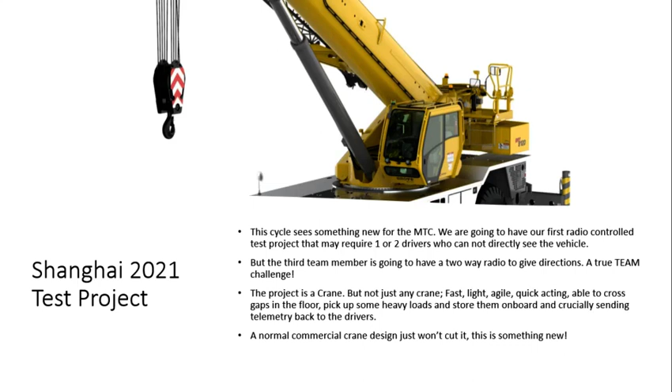So the project's a crane, as I said, but not just any crane. This crane's going to have to be fast, light, agile, quick acting in all of its maneuvers, able to cross gaps in the floor and pick up some heavy loads for its scale, and store them on board, and crucially send telemetry back to the drivers as well, so that they know what it's doing. A normal commercial crane design just won't do it for this - this has to be something new, something different, and breaking the mold a little.

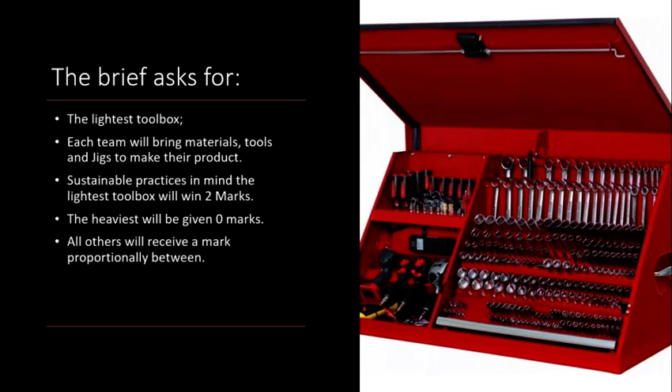So the first element of the test is to do with the toolbox. We like to be environmentally friendly, so what we're asking each team to do is bring the minimum amount of tools and jigs they can to make their product, and we do this by actually marking that. We weigh all of the products when you arrive - the jigs, the tools, and all of the materials - and the lightest toolbox will win 2 marks. The heaviest on that score will get 0. Everybody else will receive a proportional grade in between those 2 boundaries.

And then we have a judgment of work quality and visual appearance of the test project.

Now, this is based on the finished product, and we're looking for things to be made well and accurately. We're looking to see that there's no sharp edges, burrs, and all those kinds of things that come into separate criteria as well. But this one is based on the main appearance of the product and how well it is made.

So 3 judges will inspect it and give it a grade of 0 to 3. A 3 is above standards, well above the market standard. A 2 is a market standard product, something you could actually sell. A 1 is an industrial standard product, something you might sell to a company rather than to people in the world. A 0 is below that—in other words, not finished, or really poor quality and unlikely to last.

Now the brief also asks for the product to be finished, and all surfaces should be painted or covered by other means unless self-coloured. So we want something that looks nice, not just looks like a bunch of metalwork stuck together.

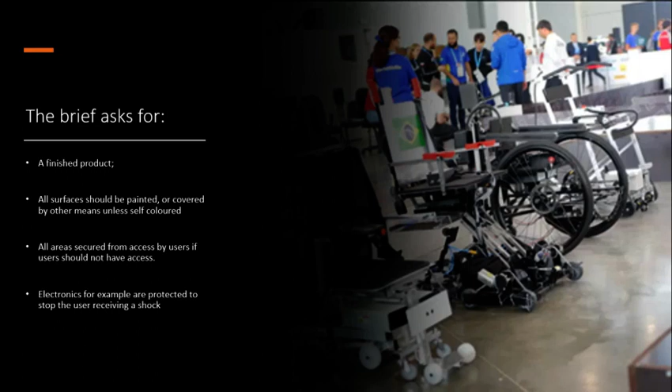All the areas within it, especially if they've got electrical access or cogs moving and that kind of thing, should be secured from access for the user for safety, just like any real world product would have. And we don't want electric shocks if we can help it either, so the electrical system should be covered as well.

Now, one of the reasons we've not actually used radio control before is that one radio control system might interfere with another. So in this brief, we've stated that you must use a system that will not interfere with another. That might be a paired Bluetooth system, for example, and you can buy the control handset and the receiver—you don't need to make them during the competition, which is again a departure, because normally you have to make everything.

A 2.4 gigahertz radio control system is another example. They're paired, they will not interfere with each other, and we need to make sure of that. So long as you have a good paired system, it should be easy marks on this particular criteria.

So, part of the physical attributes of the crane: we're looking for the whole crane to fit in a 500mm square cube. We're not only asking it to fit in that, but it has to do it under its own power. So if you have a crane that's a metre long during normal use, it needs to be able to pack under the controls into that 500mm cube.

It's not only required to fit, but we're going to race to see who can do it the fastest. So teams will have to pack down the boom, maybe retract the boom as well, turn the crane into the correct position, drive into the box, and make sure it doesn't protrude out of that box. Time will stop. The fastest team to do that will gain a mark, the slowest team will gain 0 marks.

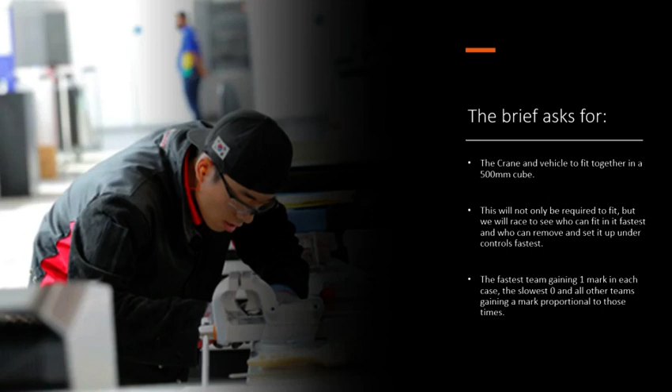We're then going to do that in reverse—how fast can you get it out and set it up? So it'll be drive it out, drive it across the 2 meter line, set the system up again under its own power. The fastest team will get 1 mark, the slowest team will get 0, and everybody else will be proportionally marked in between.

We're also looking for a lightweight product, so there's a bit of a trade-off here. If we make it too light, picking up some of the objects when the boom is at full extension means it's probably just going to lift off the floor and fall over. That won't stop your competition, but it will hinder it and receive a penalty. So you have to find the fine balance—how light can I make my design while still retaining the low centre of gravity for lifting?

Part of the challenge, not impossible. Some quite hefty, complicated calculations in there to work it out perhaps, but hey, maybe you're just going to go for it and see what happens. So the lightest product, when we put the whole thing on the scales, will gain 2 marks, and the heaviest will receive 0, with everybody else proportionally marked in between again.

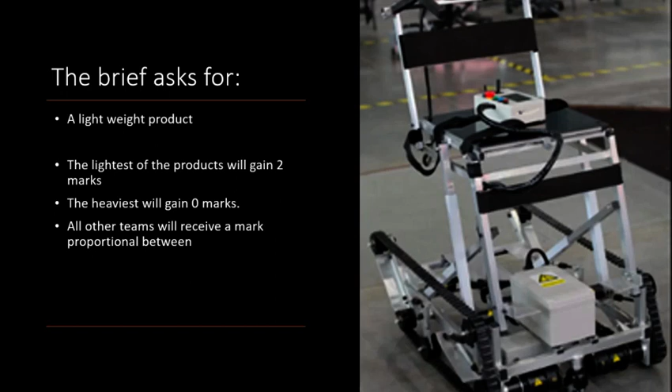Now the brief also asks for the crane to have stabilizers, so you have to fit them if you want those marks.

If you don't want the marks and you don't use them, that's fine. You might say putting the stabilizers in costs so much money, I'm going to forgo the marks on the costings. Well, that's great, that's fine, your choice entirely.

But we're asking for stabilizers for lifting projects and procedures that will touch the floor within 50mm of the front and rear of the crane. Now, that doesn't mean they can't stick out another 500mm, and it doesn't mean they can't stick out sideways 500mm. They've just got to be within 50mm of the front and rear of the crane.

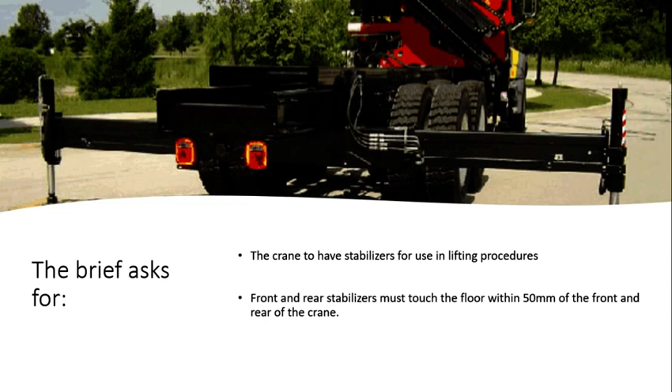Now, you could have two stabilizers that are long and come down to cover the front and back on either side. You might have a square ring of stabilizer that comes down and touches all the way around the vehicle. You might have one at the front, one at the back, whatever it is you want to do. The choices are totally yours, so long as it stabilizes the vehicle and so long as it touches the ground within 50mm of the front and rear of the crane.

Okay, some of the electronics details now, perhaps. The crane has to be able to rotate 720 degrees in both directions on the vehicle. In the brief, we've distinguished between the crane vehicle, that's the vehicle driving the crane around, and the crane itself being the part that moves on top and does all the lifting.

So we're asking that the crane can rotate 720 degrees in both directions. You might have to come up with some clever electronics to do that, and that might impact on your costs. You might find a very simple, very cheap method. If you do, can you send me an email and let me know what it is.

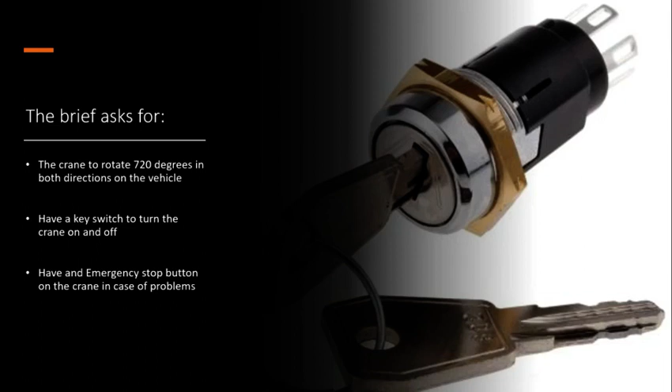We're also asking for a key switch, much like the one pictured, that allows you to turn the power on and off for the entire crane. Obviously, power isolation is a good idea, and on that point we also ask for an emergency stop button that, when hit, will knock power to the entire crane and stop everything from working. That's kind of crucial, essential stuff that you'd have on any product of this nature.

So some details for the electronic side of it now. This is a little bit of programming with a little bit of building and maybe some mechanical workings to actually house it as well. But we're asking for an LCD panel that is not attached to the crane. It's actually going to sit in the driving booth with the drivers, and it should receive telemetry and display forward when the crane's moving forward, reverse, left, right, stabilizers active and inactive.

Stabilizers active being when they're down and touching the floor, inactive when they're lifted up and not touching the floor. And then for the crane itself, we want to know: is it rotating clockwise or counterclockwise? We want the boom angle in XX degrees, and if you look in the brief, there is actually a variance, a tolerance for it.

Battery level in XX%, so we want to know when the battery's full - 99% with the XX is as high as you're going to go - and we want to know when the battery becomes unusable. And then we want a system active and ready message to say, yep, we're ready to go, everything's being received, the telemetry's working, and we can actually drive the crane.

And then finally, when we turn it on, just a little bit of jazziness, why not say WorldSkills Shanghai 2021, and we want that for 3 to 5 seconds when it's first turned on. If it's 4.5 seconds, you get the marks. If it's 5.5 seconds, you don't. It's as simple as that, really.

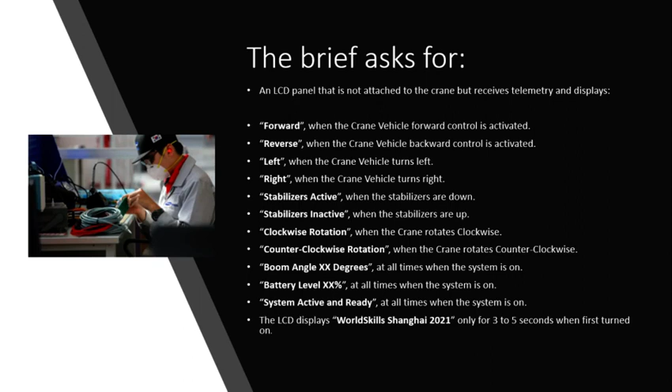Okay, so then you're going to have to demonstrate some of the mechanical items as well. We're looking for the boom angle to go horizontal at 0 degrees, parallel to the floor. We want the boom angle to go vertical, so 90 degrees or greater. If you can get it to 120 degrees, fine, you've got more than 90. If it only goes to 88 degrees, sorry, you won't get the marks.

The crane lifting cable needs to be a minimum of 1.5 meters long. You're probably going to need that anyway for some of the lifting operations based on the heights we're actually going over the top of the wall, so that's not an issue. And we need to show that it can be fully withdrawn - I think within 20 millimeters of the end of the boom should be your lifting device.

The lifting device itself will be able to grip and hold a 1 kilo item, which is specified in the brief, and go through a clockwise rotation without tipping over, and do the same in the anti-clockwise rotation. Obviously centripetal force is going to kick in if you go too fast, so how fast you want to go, what's your danger level, that all comes into practice and controls.

The crane vehicle will also need to be able to demonstrate that it can move in a straight line forward and move in a straight line back, without any steering inputs. That kind of shows us your fitting abilities - is everything made correctly, or are your tolerances out, and does it crab and go around a corner?

It'll need to be able to deploy and retract its stabilizers as well, so that we can actually see that all the controls actually match all the actions and everything actually works.

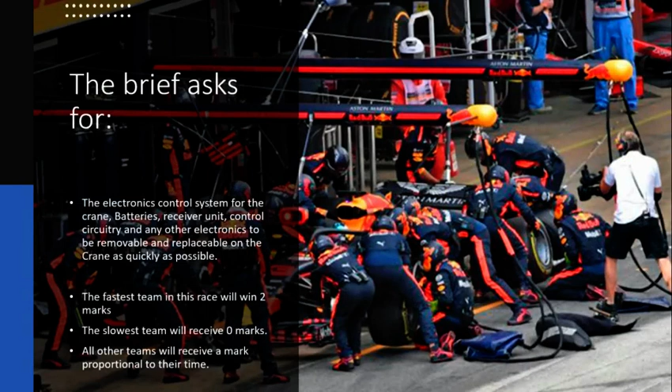On the case of time trials, we've seen a couple before, but this time this is a maintenance one. In the past we've done wheels and we've done batteries as maintenance, but this time we're going to go for something a little bit different. This time we're going to ask that all the electronics on the crane itself, or crane vehicle, wherever it's housed, can be removed. Now that might be 1 box, 2 boxes, 3 boxes, might be 4, 5 boxes, depends on your design. But they need to be removed as quickly as possible and replaced as quickly as possible.

So we're going to do a team race, and the team will run to their crane about 2 meters away. They'll remove whatever electronic control circuits and boxes. They'll come back over the 2 meter line. A judge will say go, and they'll go back, refit them, and then drive the vehicle over the line to prove that it works after the replacement of all the electronics.

Again, this is one of those marking graded categories, so we don't know how all the other teams are going to do - this is where the excitement builds. 2 marks will be given to the team who are fastest, 0 marks for the team who are slowest, everybody else proportional in between. This is the one that starts to get the giggles really going.

We also have a target area as another criteria, and again it's going to be fastest team to do this is 1 mark, slowest team is 0, everybody proportional in between. What we're going to do is start the crane off in a certain position in the center of a straight course. Behind the crane there will be an item to pick up, and in front of the crane there will be a small target area. The idea is to race backwards or turn the vehicle round, whichever you find fastest, go and pick up your object, go back to the other end and deposit it, and return the vehicle to the start line. So a nice, simple, easy race.

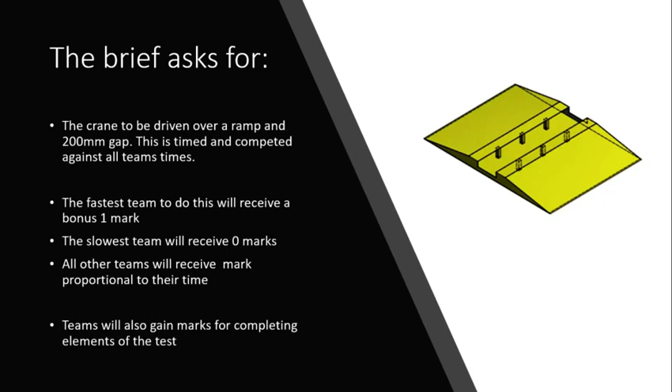The brief also asks for the vehicle to be able to negotiate a 75mm square speed bump. There are a couple of ways you can do that. One is to have nice big wheels or tracks. Another way is to have some kind of mechanism to lift you up over it. Well, the choice is yours.

The choices are infinite. So the crane needs to be able to be driven over the set of 3 speed bumps in a forward direction, set 600mm apart, and then the same in a reverse direction. You need to be able to score for both, so you'll get marks for successfully completing in the forward direction and marks for successfully completing in the reverse direction. If you get 2/3 of the way in the forward direction and for some reason stop, you'll be given the opportunity to still pick up the marks in reverse, and vice versa.

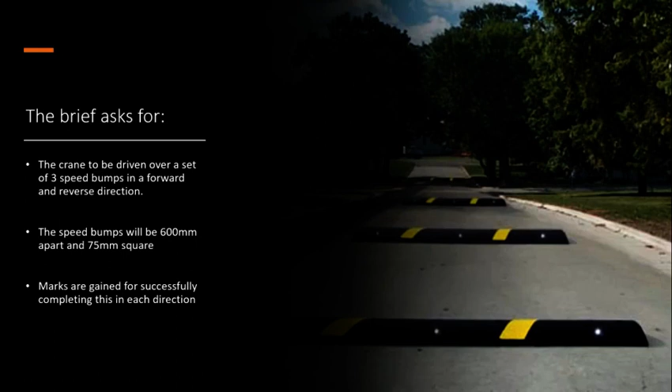What you're going to be asked to do, on remote camera, is have 2 drivers sat in a booth where they can't see the course other than on an LCD screen that they've made, or the one we've supplied if theirs doesn't work, and a spotter with a 2-way radio to give them directions. The team are going to be asked to drive around this course in any way they like. There are 2 options really.

Once you've picked up the objects, you can pick up as many or as few as you like. So let's say we pick up 2 objects, we have to be able to go over speed bumps during those 2 object pickups, and then you can drive back to the depositing area. Now, number 1 doesn't necessarily go in deposit area A, it probably goes in C or D. So you'll need to know which place to actually deposit them, and that'll probably be the spotter's job, saying left, right, number 3 goes in E, whichever it is.

Now, if you wish to access the area for unloading, there are 2 ways of getting there. One is over that ramp we talked about earlier with the 200mm gap in the middle, or secondly, there's a bit of a course you can negotiate around, so if you can't make the ramp, you still can compete in the time trial.

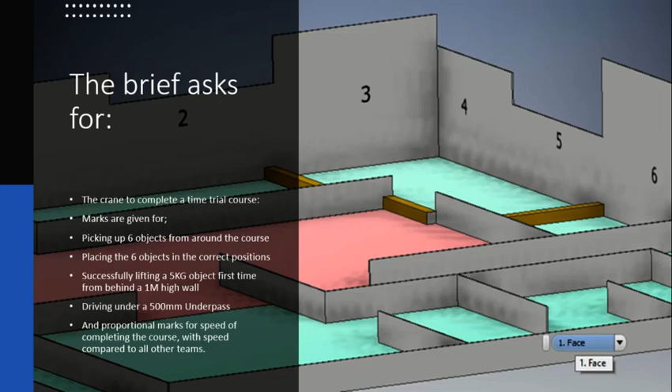Okay, then the final time trial that we're going to be doing is the movement of M6 by 35mm bolts. So we've got a course that's a couple of meters long, and there's two containers. One will be empty at the top of the course, one will be full of 5 kilograms worth of M6 35mm bolts. The team will be required to then drive for up to 30 minutes.

If they break down in between, that's fine. There's still marks available because somebody else may break down before you. And also marks available because you may have still managed to move an awful lot of bolts before you broke down. So there's two actual marking categories: one is that you continuously move for the full 30 minutes, and the other is based on the weight of bolts you managed to move.

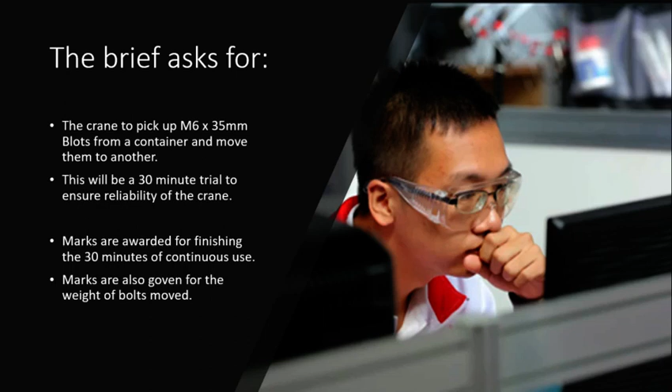So what will happen, you pick up to 5 kilos of bolts. You might only pick up a kilo at a time. You might be able to pick up all 5 kilos using the crane itself, load it on board, drive it up to the other end and unload it. When the first container becomes empty and the second container is full, the spotter is allowed to swap them over while the drivers continue to drive, and a judge will note that that's one 5 kilo load taken. And we keep going for as long as you can and move as much as you possibly can.

Okay, so a couple of things you need to be aware of. We normally have a 3-day build time, and on C4 we call that test day. Some of the tests are conducted throughout the competition itself, C1 to C3. There are a couple of tests we even do on familiarization day, which is normally C-2. But on C4 we do the bulk of our testing, so all the time trials, all the weight categories for a finished product, all that kind of stuff - C4 is dedicated to that. So it's a real day of fun and a real day of sweating for some people, but it's brilliant - one of the most enjoyable experiences of my life.

So on C4, we'll do all the tests in the order, and the order is specified in the brief. Now, bear in mind, in the brief itself, not only do we have the criteria, but below the criteria, the brief spells out exactly how the test will be conducted. So when you're doing your own trials, when you're developing your product, you have to take all of that into account, but you can also test it in the same way that it will be tested to make sure. So it also gives you an order of the tests, and I would say if you're conducting any tests, do them in that order, because if it breaks down on one test every time, then you know you've got a severe problem.

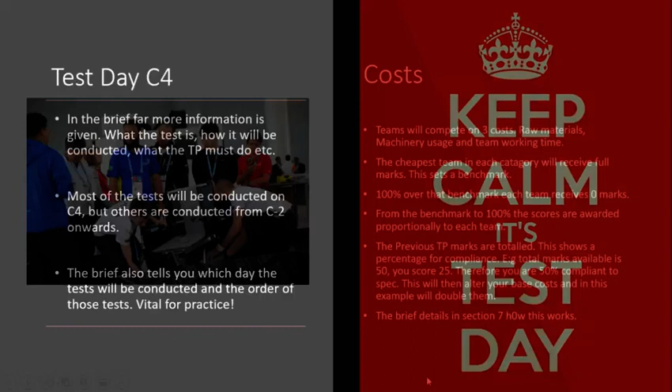Okay, so we also have a little section of costings, and again, we don't know what any other team's done. One team might be able to make it for €10, another team might cost €50,000, we just don't know. So we will compete on 3 actual costs. One is the raw materials, so how much did all of the components to make your product cost? Now, some of those are done on weight to make it even around the world, so things like raw materials, metals, plastics, batteries - they're all done by either watt hour in the case of batteries or weight in the case of plastics and metals, and different types of metals and different types of plastics have a slightly differing cost. There is a spreadsheet available that we'll quite happily send out to anybody that actually is to be used to put all this together.

So we also ask for evidence of the raw materials. If they're done by weight or watt hours, then we don't need the evidence. But for everything else you buy, so it might be a resistor, it might be a cog, whatever it is, we require a link putting into that spreadsheet that shows us where and what that particular item is. So where did you buy it? How much did it cost? Obviously that link then with exchange rates, especially if you buy it outside of the country you're in, might change a little, and we do allow for a little variance on that, because everybody is required to use an exchange rate which is on the 1st of April of the year of competition.

The second area we use is how much machine usage you do. There are timesheets for booking on and off machines, and we will actually calculate the time that you've used on a lathe or on a milling machine, maybe in the welding bay, etc., and they attract a cost, and the cheapest team will win that category.

Alright, well, Portfolio B - that's a little bit different. Portfolio B, I often say to my national teams, and the same to my international teams, you probably hand this in 3 times, or you need at least 3 copies.

So you come on familiarization day and you hand in a full set of 2D and 3D and schematic drawings to the experts. They'll use this for a toolbox check to make sure you've got nothing that's contraband, to make sure that your raw materials are at least 50mm longer if they are lengths, or 50mm in 2 directions if they are sheet materials, and to make sure that they are a raw material and not a pre-cut, ready-to-go material.

So one set goes to the judges. A second set you will need, which has to be on coloured paper and has to have draft on it, so that we know that's not what you're going to hand in at the end of the competition. That might be your set of designs and plans that you're actually using to build the item. You might be very well drilled and not need them.

Then Portfolio B is part of the competition, so somebody has to do the 2D and 3D drawings and the schematic drawing. It can be one person or the whole team, that's your choice. But by 12 o'clock on C3 we expect that to be handed in, and that's what will actually be marked, against the ISO standards.

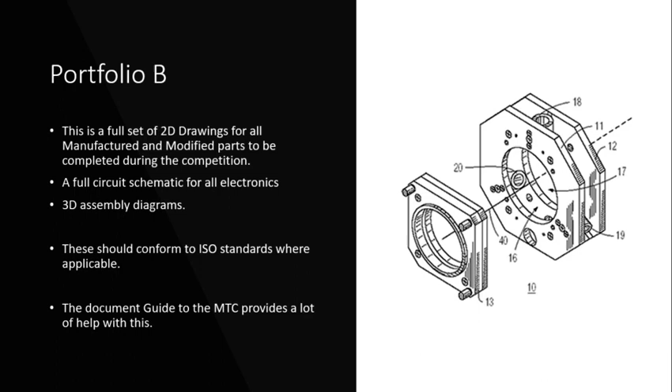And then that brings us on to the surprise projects. Each country is asked to bring surprise projects with them, one for each surprise area. Now we have CNC milling, manual milling, turning, electronics assembly, additive manufacturing, reverse engineering, MIG welding, TIG welding, and sheet metal fabrication. All of those could be selected. We normally select between 7 or 9 of those surprise projects and make up 30% of the marking scheme with that. That's our 30% variance.

So about 3 days before competition, we'll all get together and look at everybody's designs. It'd be nice if you could bring some actual built working items so it's easier to see the intricacies. We go through and might make some slight alterations. Sometimes we'll vote for very easy ones because we've got a hard test project, sometimes very hard ones because we've got an easy test project, and everywhere in between.

So we all sit around the table and have a very democratic vote. You're asked to pick your top 3. We'll see which one's got most 1s, 2s and 3s for each of the 9. We select those and make up the marking scheme to 30%, and then those are given to the teams for 1 hour. They're not allowed to take notes or take them away with them, but they get 1 hour to go over their surprise projects on familiarization day.

Following that, they'll be removed from them and given back from C1 onwards, and it's up to the teams to work that in. That obviously has an effect on their timing, which has an effect on the previous marks we talked about in Portfolio A. For the test projects, it's vital that you understand what's being done and what's being used.

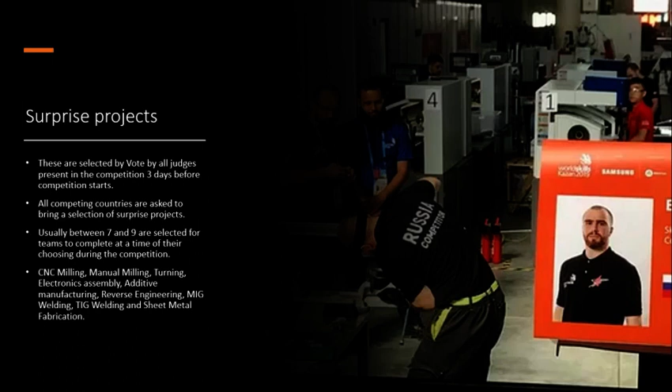So how do you put a team together? I have to say there's no ideal solution for this. There's no right answer, there's no wrong answer. Many countries do it in different ways. In the UK we have a national competition and teams are selected from there. I then select 9 people, I train them for 12 months, and then from the 9 I select 3 and put a team together.

Some countries do it in a slightly different way. They don't select 3 random people, they have a national competition and the teams stay as teams. Other countries do it completely different again, and they have no national competition whatsoever, and they select 3 people from the industrial electronics, welding and CNC disciplines and build a team from them.

The solutions are multitudinous and completely up to you, but one thing I might suggest: if you haven't had a national final and selected somebody, perhaps you've got somebody from CNC, somebody from welding and somebody from industrial electronics who might be your second choice to be taking forward into competition. But those 3 might also make a very good team with the base skills already in place to go on and become an MTC team. I do know of at least 2 countries that do it that way, and it works. There's no right answer, no wrong answer, but if you have those base skills and 3 people who can work together as a team and get on well, then you have a really good start for this competition.